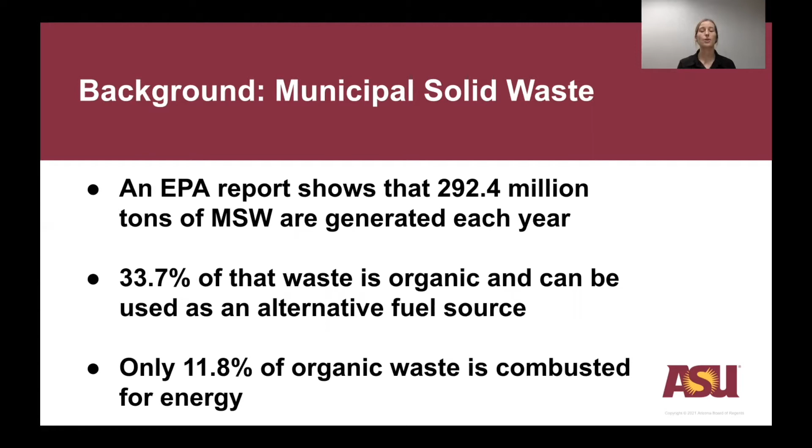From a 2018 EPA fact sheet, we know that about 292.4 million tons of municipal solid waste is generated each year. Of that, approximately 33.7% of that waste is organic and can be used as feed in alternative fuel technology. The same report shows that currently only about 11.8% of organic waste is being combusted for energy.

There are a multitude of benefits from these alternative fuel systems, but some of the most important ones include saving money on landfill dumping fees, producing and selling methane for economic gain, benefiting the environment by reducing greenhouse gas emissions from landfills, and it sets an example for other cities and states to do their part in reducing dependencies on landfills as well.

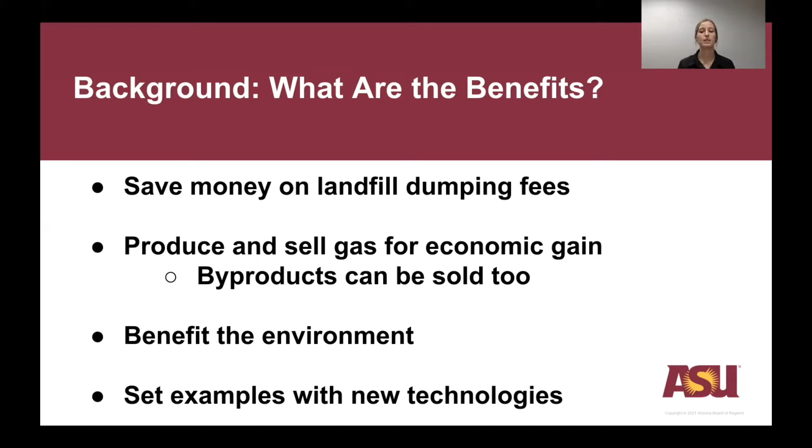So what is an alternative fuel source? It's essentially any fuel that isn't petroleum, and in terms of municipal solid waste, the best candidate is organic waste. This primarily consists of food waste and yard trimmings. When using this organic waste, a renewable natural gas can be produced.

These kind of fuel sources are already widespread in Europe and the agricultural industry in the US. Of course, they may use different kinds of organic waste like manure, but the process is virtually the same.

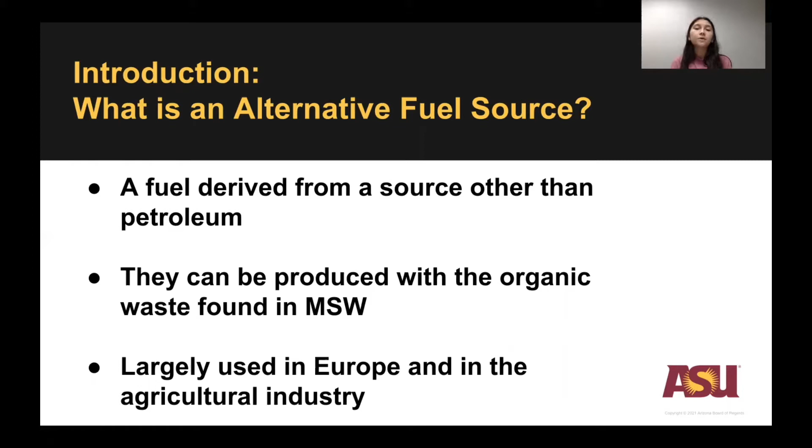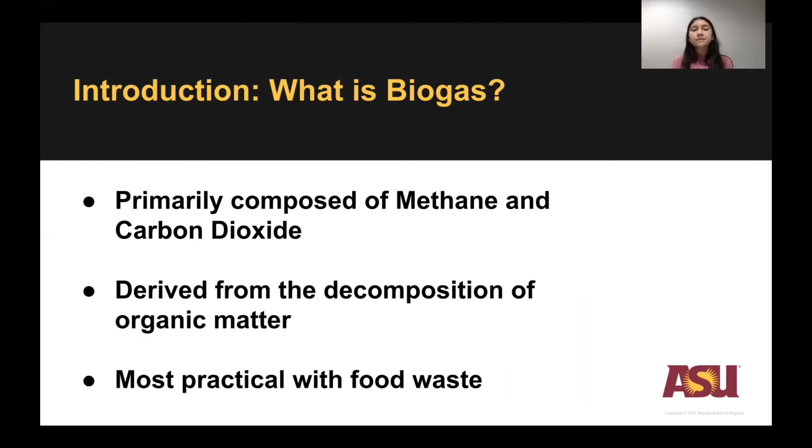What is biogas? Well, it's primarily composed of methane and carbon dioxide, and it's derived from the decomposition of organic waste through bacteria. As that waste breaks down, the resulting gases are then collected. When you're producing biogas, food waste is the most practical and least problematic input source for municipal solid waste.

What is syngas? Syngas is an abbreviation for synthesis gas. It's primarily composed of methane, hydrogen, and carbon monoxide. The most common method to produce syngas is through a gasification process. This is basically inducing decomposition through high temperatures and collecting the resulting gases.

Unlike biogas, any kind of waste can be used to produce syngas. But using non-organic waste can cause problems in the environment and to the technology. So our group chose to focus on using organic municipal solid waste instead. In a gasification process, you can use multiple kinds of organic waste. So for this alternative fuel, we are including food waste and yard trimmings.

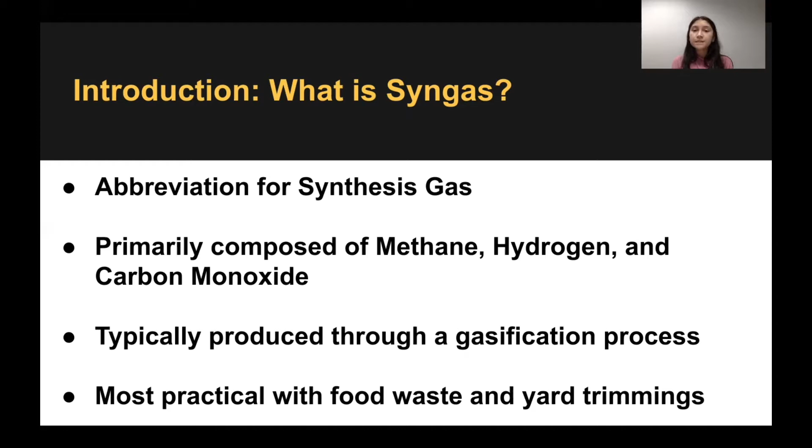The research methods used within this project include researching alternative fuels, determining the most feasible technologies for Peoria, evaluating the necessary financial investments, and examining partnerships and local examples of current technologies.

One of the main technologies used in biogas production is a landfill bioreactor. But for Peoria, it's unfeasible to do on their own because they don't have a landfill. This could be a potential option if they were able to partner with the City of Glendale or Waste Management in Phoenix, since they already have existing landfills.

Anaerobic digesters are another common technology in biogas production. What's unique about this technology is that it can be a standalone system. Because of that, this is our recommended technology for Peoria. They can also work under wet or dry conditions, meaning with or without the addition of water. But because water is a limited resource in Arizona, we decided a dry anaerobic digester would be best for the city.

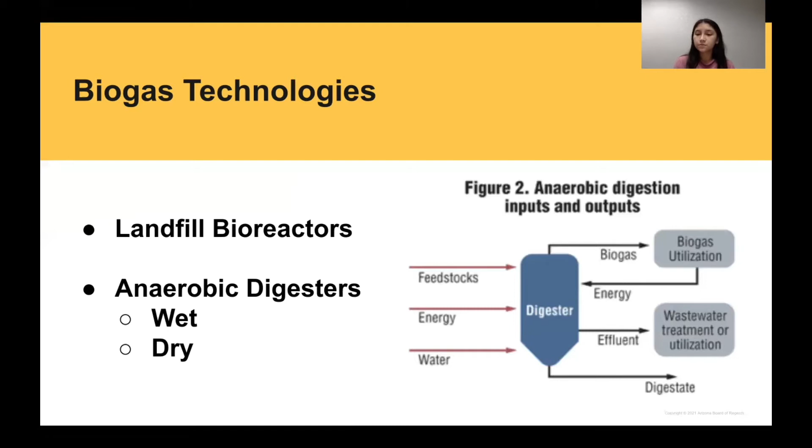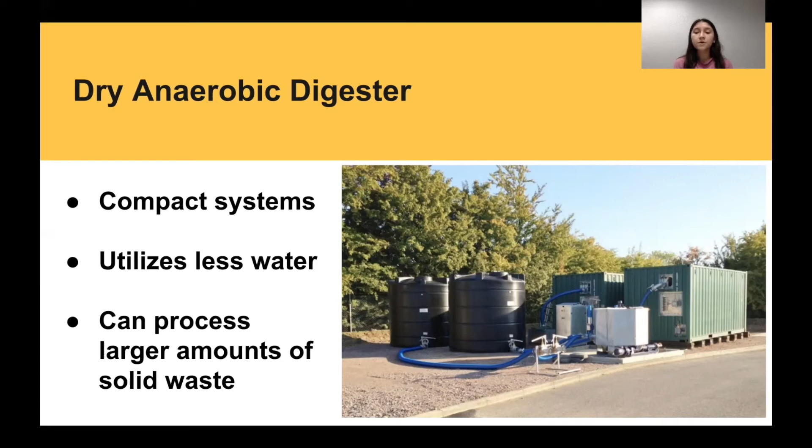So what are the benefits of dry anaerobic digesters? These systems can be extremely compact. The photograph on the right is an example of how small they can be, which makes it possible for Peoria to construct themselves. They also have the capacity to handle larger amounts of waste, but depending on how much waste is going to be processed, the system would need to be larger. If this was constructed in a partnership, the other partner could contribute their waste as well and maximize fuel production.

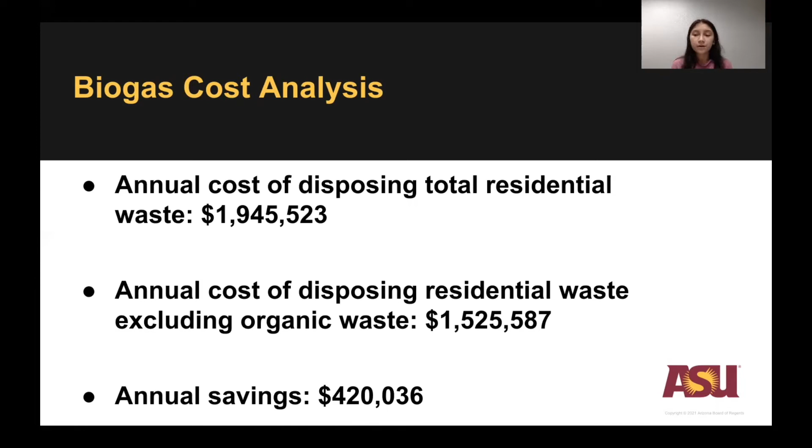We calculated that Peoria pays about $1,945,000 a year to dispose of their solid waste. If all of their organic waste was dedicated to a dry anaerobic digester, they would only pay $1,525,000 a year to dispose of their municipal solid waste. Based on that, they can annually save up to $420,000. While this is the best case scenario, it still shows the potential these technologies can have.

The average cost to construct a small-scale dry anaerobic digester is $750,000. Based on the annual savings, it would take just under 2 years to break even on capital costs. While our report excludes the cost of operating and maintenance and other variable costs, there are additional opportunities for economic gain, like selling biogas or its fertilizer byproduct.

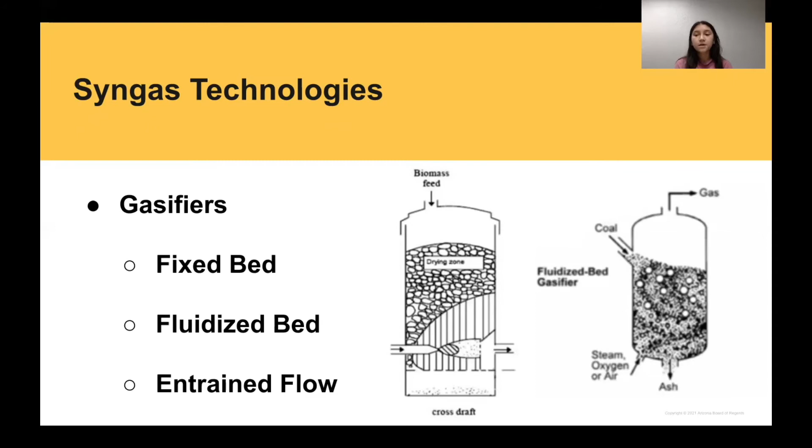Similar to biogas, there are multiple options and processes in syngas production. The most common technology is a gasifier. Within the gasifier technology, there are multiple options, like fixed bed, fluidized bed, and entrained flow. Based on Peoria's parameters, our group has recommended a fixed bed gasifier. The diagrams on the right show the general setup of the system.

When compared to other gasifiers, this specific option is lower in cost. Additionally, it has flexible design options, such as updraft, crossdraft, and downdraft. These refer to the direction of the airflow and where the gas will be collected from. It's entirely up to preference, but it's nice to have multiple options. Another benefit to fixed bed gasifiers is that they are adjustable in scale. This makes it a practical option for Peoria since they are limited in space.

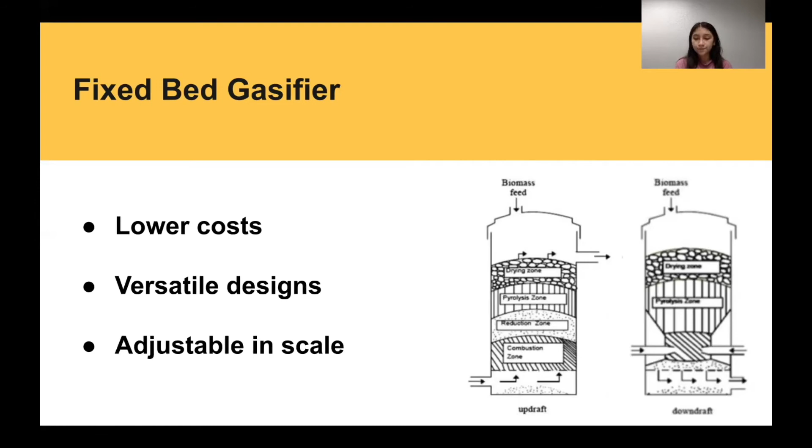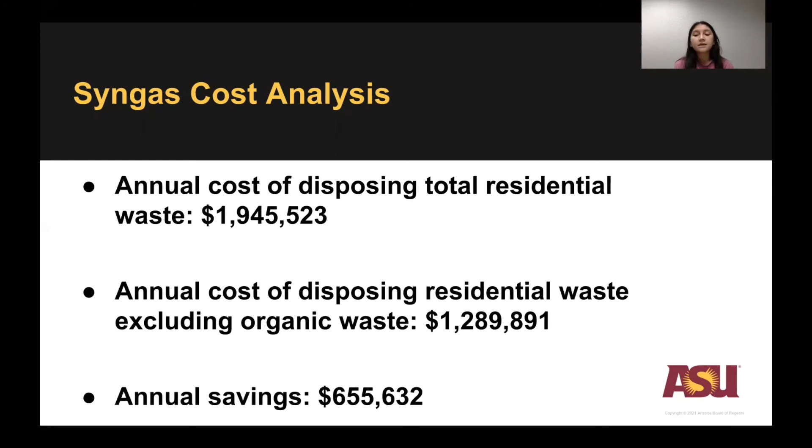We calculated that Peoria pays about $1,945,000 a year to dispose of their solid waste. If we used all of their food waste and yard trimmings for syngas production, they would only pay $1,290,000 a year to dispose of their solid waste. Based on that, they could annually save up to $655,000. While this is a generous estimate, it indicates how these technologies are a prospective option for the city.

For our example, we chose a downdraft fixed bed gasifier, and the average cost to build a small-scale one is $112,000. Based on the annual savings, it would only take 2 months to break even on capital costs. Our analysis excludes other costs like operating and maintenance, but there are other opportunities for economic gain, like selling the syngas or even using it as an energy source.

In addition to the recommended technologies, our group has recommendations for education and public outreach. Public perception is a huge factor in implementing changes within a city, and through interviews with our experts, as well as findings within our research, we recommend conveying this information with the emphasis on the benefits the community will see, such as reduced energy costs in the future. Many cities have recycling days that are used to educate the community on proper recycling, which is a great opportunity to expand and create food waste separation days.

Properly sorting waste to ensure only organic waste makes its way into the feedstock will be a challenge for the city. Some ways to overcome these challenges can include creating incentives for willing community members to partake in dropping their food waste off in a designated drop-off location. By giving community members the option to participate, contamination is less likely to occur. As the city expands its waste sorting, there's a concern of community members treating food waste bins as everyday trash bins, and education on proper waste sorting will be key in reducing this potential contamination.

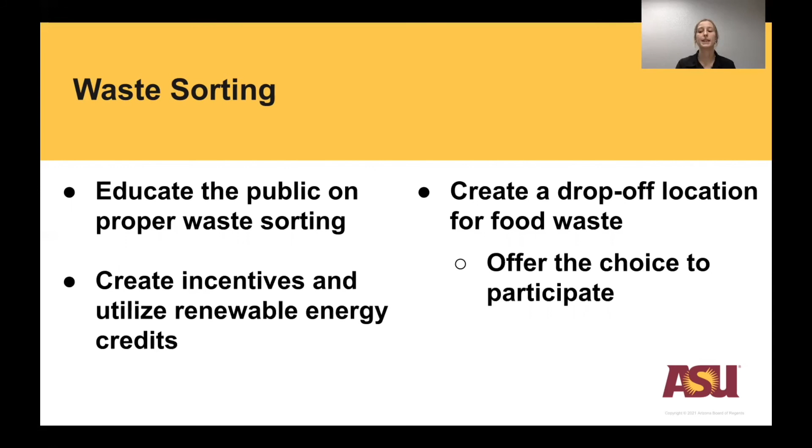And to recap, we recommend creating educational and public outreach events, implementing waste sorting within the community, and technologies of a dry anaerobic digester for biogas and a fixed bed gasifier for syngas. These technologies can be used within potential partnerships through already existing facilities or with other entities who are interested.

In conclusion, the City of Peoria currently utilizes other nearby landfills for the disposal of municipal solid waste in their city. This research was able to present Peoria with options of utilizing their city's municipal solid waste to create alternative fuels that have many economic and environmental benefits. The students' goal was to encourage and aid Peoria in making municipal solid waste a long-term investment rather than a burden. By continuing with this project, Peoria will have the ability to lead the way in Arizona and in the nation by providing safer and more sustainable options for the community.